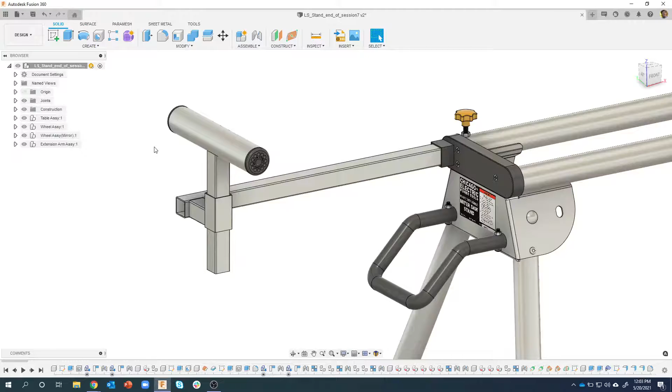So let's go ahead and dive in. We left off last time having created this extension arm assembly. I'm going to finish this up, and we're actually really close to being done. We'll finish this extension arm assembly and then move it to the other side, and that's pretty much the end of the miter saw stand.

I'm probably going to do one more episode doing exploded drawings, like you'd see in an assembly drawing. So there'll probably be one more episode for this, and then I'll have to figure out something else to teach. If you have any ideas, please feel free to share them in the chat on what you'd like to see, and we'll try to make that happen.

Okay, so we left off having finished this little end part here on this roller, and now there's a part that you can flip up and over that acts as a stop. So that's what we're going to be creating next.

Let me go ahead and activate this extension arm assembly. I'm going to create a new component called roller pin. Let me move this over here. I definitely recommend you name your components—it makes things much easier to find.

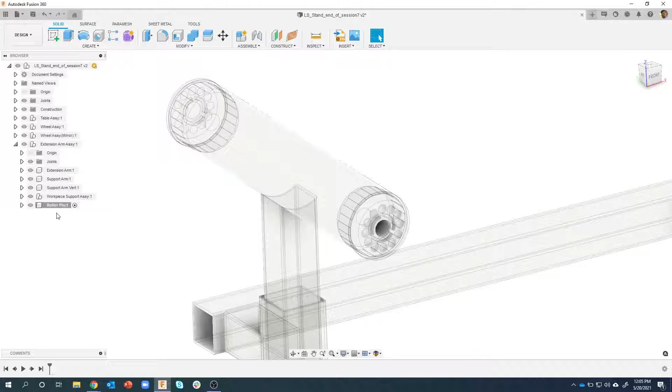Like I showed last time, I like to use some of these primitives instead of having to create a sketch just to make a pin. Instead of creating a sketch, drawing a circle, and dimensioning it, I can just get away with creating a cylinder. I'll do it on this front face right here, near where I need it to be, and just click over here somewhere.

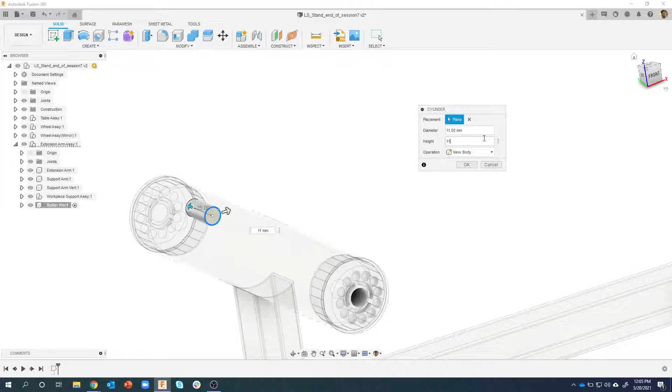Let's go ahead and make that 11.5 in diameter, and then in height, I'm going to set that. I showed this last time—I'm in millimeters right now, you can see that here, but I can also type in other units. So for example, 11.25 IN for inch, and you can see it does the conversion for me, so I don't have to use a calculator or anything like that.

Then what we're going to do is chamfer these edges with a small chamfer. Let's do maybe something like 0.5 millimeters or whatever—you can see it kind of deburrs the edges of that.

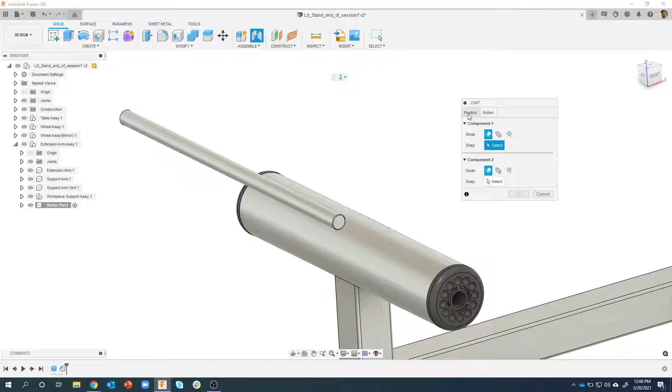Then I'm going to use the joint command to put it where I want it to be. I'm going to change my motion type. I know I want it to be a revolute, and you'll notice there's two different tabs, the position and the motion. I like to jump over here and say I'm going to do a revolute joint, and then come back here and specify how I want to position that. Hopefully you've seen enough of my live streams that I have a little saying I use when I create these joints: which one do I want to move, and where do I want to move it to?

That's kind of how I remember it - this is the one I want to move, and I want to move it to this other part. So I know it's asking for basically this rod right here. As I hover over this cylindrical face, I get a start, a middle, and an end point, so I'm going to grab this middle point right here. Then I'm just going to come over to this cylinder here, and just like the other one, it has a start, a middle, and an end. So I'll grab the middle there, and you'll see it positions it right where I need it to be, lined up in the center.

Now, the last thing it's asking for is this snap. Actually, no, I already did that. So let's jump over to the motion. It'll be hard to see, but if I hit play, it's actually revolving. I can see the shadow moving slightly, so I know that's correct. I'll say OK - so I've just positioned that roller pin.

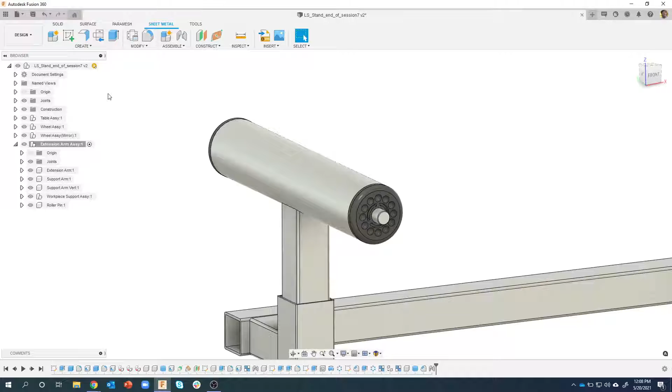Now I'm going to activate my extension arm assembly because I'm going to create another new component here, and I'm going to create a sheet metal component. So I'm going to jump over to my sheet metal tab. Now you're going to see - why did I activate this top level assembly? Well, I need to create a sheet metal component, and I want it to be underneath this extension arm assembly. If I had left my roller pin active and said sheet metal new component, it would have put it underneath this roller pin, and obviously that's not what I want. So I'm going to activate this guy, say new component, and now you can see it's going to create a sheet metal component.

Just like before, I can give it a name. I'm going to call this workpiece stop. And I'm going to expand open this library, so you can see I've already done some sheet metal parts in this design. But if I expand open this library, I can see all the different kinds of materials that I have, and I want to pick the stainless steel millimeter. So I'm going to go ahead and do that one there - stainless steel millimeter.

If I expand that open, I can see what the thickness is, what the K factor is, etc. So that's a little tip - if you want to know what size that is, you can expand open any of these. Here's steel, you can see 2.5. If I expand this guy open, you can see that's inch, 0.1, etc. So I'm going to say stainless steel millimeter.

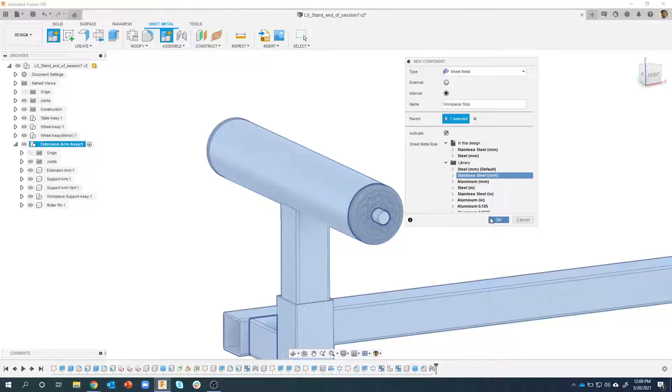And now you can see I have a new sheet metal part underneath the extension arm assembly called workpiece stop. I love our sheet metal module - it allows you to create sheet metal parts very, very quickly.

So I'm going to just start with a basic shape, like a rectangle, and then I'm going to start folding that shape. Start with a rectangle here - I want it to be 260 millimeters wide, 260 by 50 millimeters tall. And there is my shape.

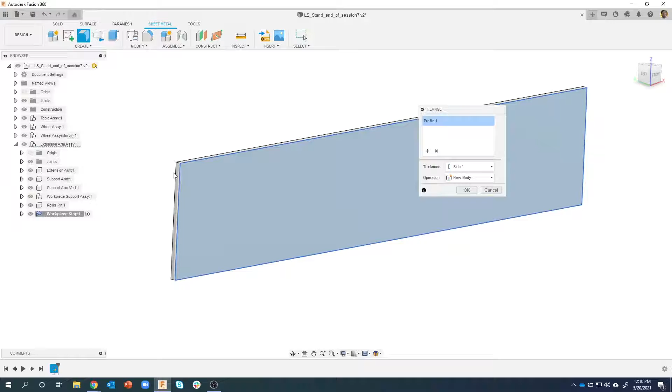If I use this flange command, if I hover over it, you'll notice it's actually like multiple commands in one - it can create sheet metal faces or flanges. Right now I don't have anything except for a profile, so I'm going to say flange. I'll click on that, and you'll see it's going to use my sheet metal rule, the material I picked, and the thickness for it, and it's going to create a sheet metal component for me.

Then I can come along and start modifying this. I could come up to the flange command, or I could pre-select. For example, I'm going to pre-select that back edge, right mouse click, and you'll notice at about 4 o'clock is the flange command, so I don't even have to go up to the menu. I pre-selected that edge, right click, and say flange.

I personally like to start to drag to kind of visually see what's going on, and you can see how it's going to bend that over. For this, I want the height to be 13. You can see how that updates. Then we have a lot of options here like angle, height datum, bend position, etc. I'm going to leave this to be outer faces.

If you don't know what these mean, I highly recommend watching my live stream on just the sheet metal module itself. I go into a lot of detail about what the height datum and bend positions mean. In fact, I even create a cardboard box and show how to do these folded cardboard boxes, so keep an eye out for that. I'll try and link that in the description of the video.

So height datum, I'm going to say outer. Bend position, I'm going to say adjacent. And watch what happens when I say adjacent - you can see how it moved up a little bit. So having different options here gives me different results. I'm going to say adjacent, and that'll make more sense as we keep going.

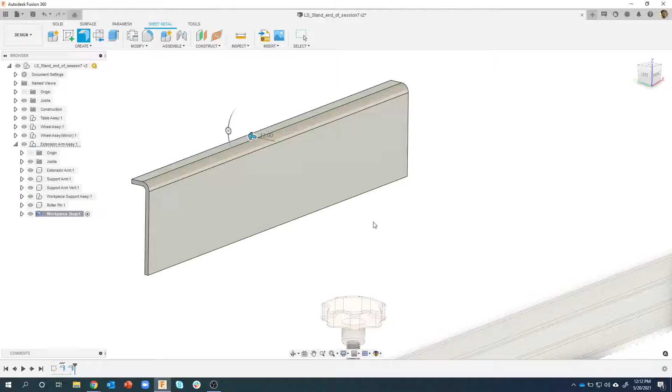I'll say OK. Then I'm going to do the exact same thing here. I'm going to click this front edge and say flange, and start to drag to see what that looks like. Now I'm going to do something a little bit different - instead of a full edge, I'm going to do a symmetric. Watch what happens: I get these arrows, and if I start to drag them, it's going to create a symmetric flange.

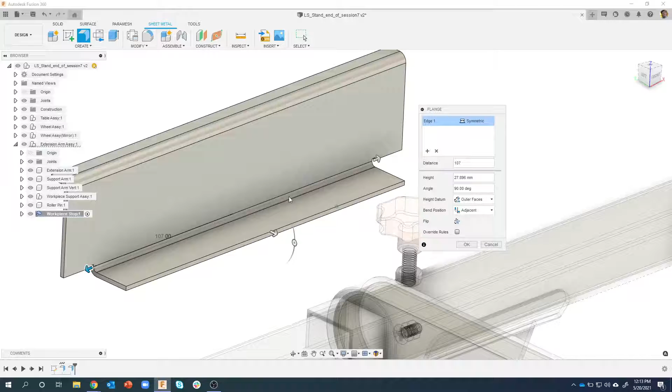You'll also notice if I zoom up here, there's some bend reliefs, and we're going to talk about that in a little bit. But I want the distance to be 107 millimeters, and you'll see that updates - this is 107 millimeters wide right here. The overall height I only want to be 19 millimeters, so you can see how the height was shortened a little bit.

We'll do outer faces, we'll do adjacent. But I don't want to have this corner relief like this - I want to do what's called a tear. So right here is override rules, I'm going to expand that open, and I want to do a bend relief override. Bend override would allow me to change the radius of this bend right here, while bend relief is this little thing you're seeing right here.

So I'm going to check that on, and you can see bend relief is straight. Watch what happens if I go to round - you'll see that changes to a round relief. Or if I go to tear, you can see it just doesn't have one at all - it's going to tear the material there, and that's kind of what I want in this case. So I just did this bend relief override, and we'll say OK.

Now think about if I were to have to model this by hand without using sheet metal - totally doable, but that would take some time and effort. But all I really did was create a rectangle, thickened it with the flange command, then did the top flange, and then did this bottom flange.

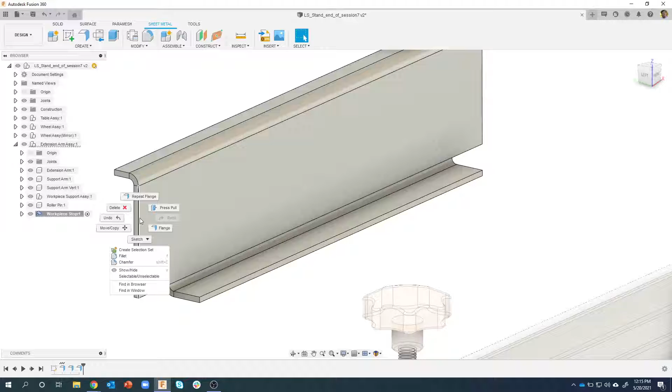Now I want to create some side tabs. Just like before, I'm going to pre-select that edge and come in here to flange. Now if I start to drag, watch what happens - it starts to give me a preview of what that's going to look like. Again, I don't want to do a full edge. Last time I did a symmetric.

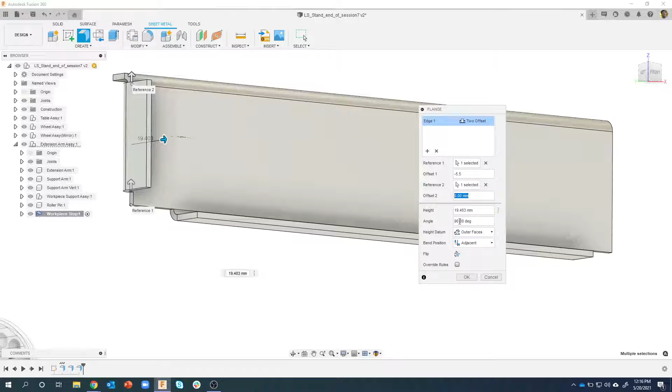This time I'm going to do what's called a 2 offset. When I do a 2 offset, you'll notice my menu gets a little larger, and you see these references, so I can specify how far from this first reference I want the tab to start. They're labeled reference 1 and reference 2. On this bottom one, I want to come up 5.5 millimeters - so I typed in minus 5.5 millimeters. For this other offset, I want to do 22 millimeters, and you can see how it brought that way down. So I'm basically able to put this tab where I want along that edge.

And just like before, I don't want to have a bend relief, so I'm going to change that to a tear.

And then the last thing I need to do is specify how far this tab comes out, and that is this height. So we're going to say 40, and we can see that sure enough it creates that tab. Pretty quick and pretty easy.

So I looked over at the questions Angelo is bringing into this document. A question from Greg Hale: you mentioned a while back about doing a Cessna Skymaster drawing, any chance of doing this in the future? I think this is actually humorous because I thought about that this morning. I have them hanging up, in fact, let me switch to my camera here. I actually have them hanging up right here in my light and all that kind of stuff. So yes, Greg, I want to do that. I haven't had the time, but it is on my list, and it might be a future upcoming one, because no joke, I was looking at it this morning going, man, I really want to do that. So thanks for asking, and kind of freaky that you were thinking what I was thinking today.

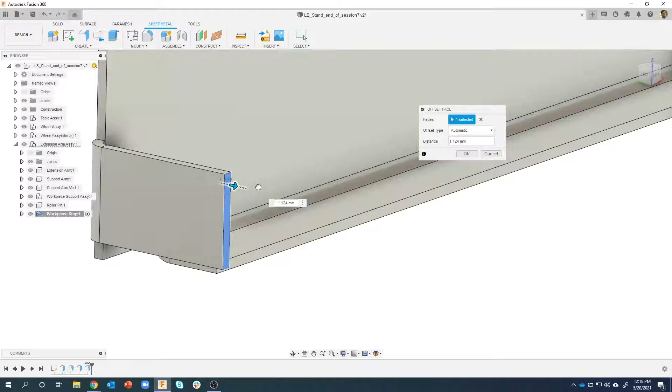It's been a long time since I've done this. If I were to make a physical change, like do a press pull... yeah, see now it's maybe not doing it. I might have to restart Fusion to have that happen, but I think it shows the original and then shows the update. I like to look at it just like I'm physically changing the model. I don't really personally like that ghosted result thing, so I have it turned off. So Steve, to answer your question, yes, I do have that turned off, and I personally recommend having it turned off, just a personal preference. So I'm going to turn that guy off.

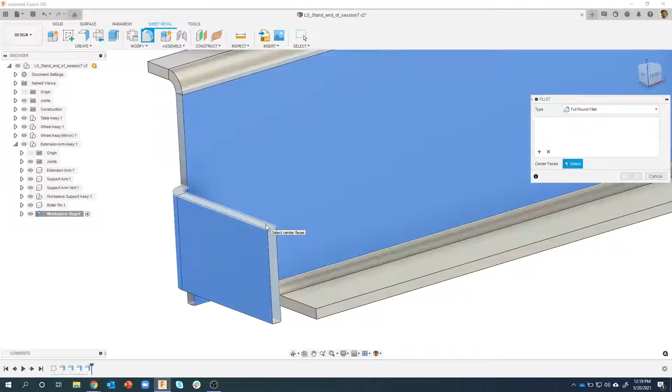Okay, so we created that tab. Now I want to fillet these edges. I showed in a previous live stream that we have a really cool new fillet feature called full round fillet. Unfortunately, it doesn't work yet with sheet metal parts, and you can kind of see why—as I'm hovering over this face, it kind of knows that this was originally this other face and all that kind of stuff. I do know they're working on adding it into sheet metal, so I can't do a full round fillet right here.

However, I'll show you a cool tip in case you can't do a full round fillet. I want to do a full round fillet here, so I'll select that edge. But what do I need to type in for the distance? I have no idea, so I can click on these three little dots and say measure. Then I click on an edge and watch what it does—it measured that edge and entered that number in there. So 22.5, well that's too big, I want half of that, so I'll come in here and say divided by 2. Now it took the length of this edge and divided it by 2, and sure enough I get that result. Let me add in that edge there, and you can see I basically get a full round fillet.

So once again, I was just clicking on these three little dots. It shows my last numbers I've entered in here, but then also that measure option. Cool little tip there.

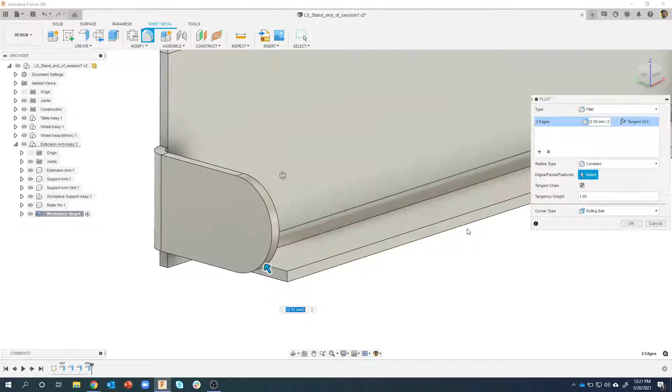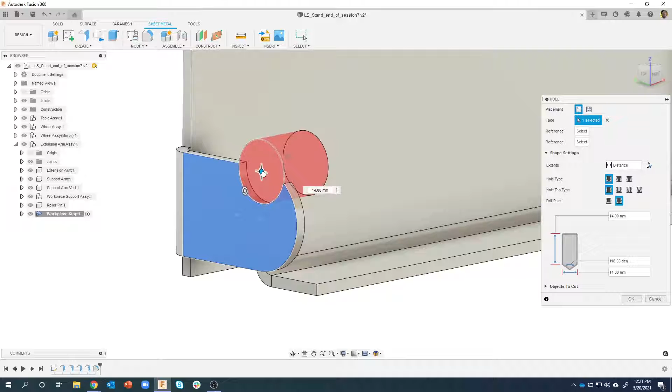Then the last thing I want to do is put a hole through here, and again, I love the hole command. I'm going to come up here and say hole. I purposely click kind of away from where it needs to be, so you can see where I clicked and where it showed up. Then I can click and drag, and you'll notice I get these two little white dots below the circle. This right dot is the center of my fillets over here, and this left dot is the center of the whole face - almost think of it as the centroid of that face. All I have to do is get near this dot, and you can see it snap into place. Now I know that hole is perfectly centered with my fillets. I didn't have to create a sketch, draw a circle, add dimensions, any of that.

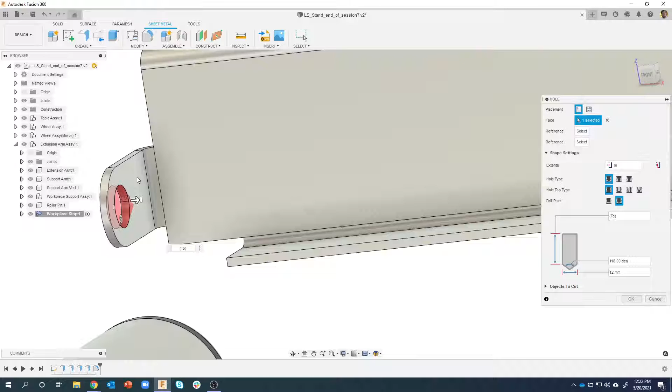All I need to do now is type in the correct diameter, 12, and then instead of a distance, I like to say go to a particular face. So I'm going to rotate around, click that face there, and it knows it needs to drill all the way through to that face. I might even say let's just do a flat. I'll say okay. Now why did I say to go to that face? Well, if I ever change the thickness of this material, I always want that hole to go through. So if I made this thicker and only went 2 or 2.5 millimeters in, and then changed it to a 4 millimeter thickness, it wouldn't go all the way through. But by saying go always to this face, no matter how thick that face becomes, the hole will always go through it. A neat little tip there.

Okay, so I just spent some time creating this tab, and I want the same thing over here. This is another thing that blows me away with sheet metal - you can actually mirror features and it'll still unfold. What do I mean by that? Check this out. I'm going to say unfold, unfold all the bends, click on this stationary entity, and we can see that sure enough, everything unfolds.

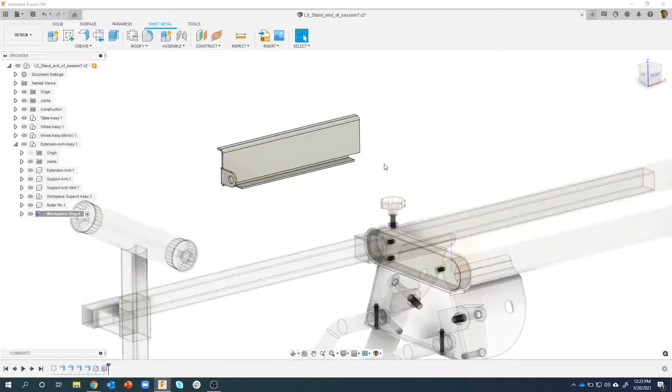Okay, well now I need to mirror. But I created this kind of out in space somewhere, so if I turn on my origin, it's way over here somewhere, so I don't have a mirror plane. I need to create one. So under construct, midplane - this creates a construction plane at the midpoint between two faces. Select two faces or planes. I'm going to say this face here and this face here, and you'll see it created a plane between those two faces.

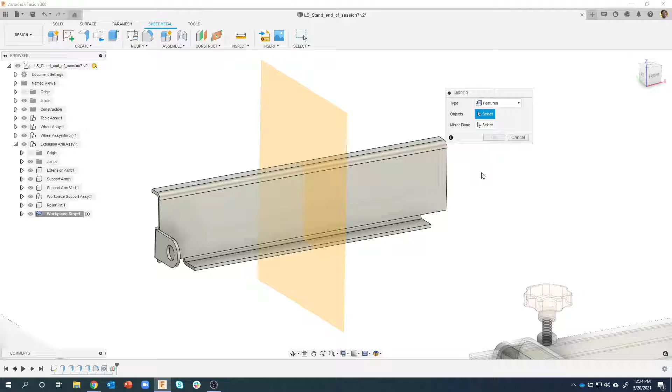I'll say okay, and then check this out - I'm going to come in here and say mirror. Now by default it says faces, but I hardly ever use faces, I almost always use features. So I'm going to switch to features, and I want to mirror the flange - this last flange, you can see when I hover over it, it highlights the flange right there. I also want to mirror the fillets, and I want to mirror the hole. I don't need to mirror the construction plane, so I selected 3 features out of my timeline. What's my mirror plane? This is my mirror plane. It gives you a little preview of what that's going to look like. I'm going to say OK, and that mirrored over to the other side.

Let me turn off my construction. Now, one thing I like to do is check - is that still a sheet metal part? I can check that by coming in here and saying unfold. What's my stationary entity? This guy here, and notice it still unfolds. So that's a verification that it is a valid sheet metal component. The fact that we were able to mirror that feature over to the other side, I just think is huge.

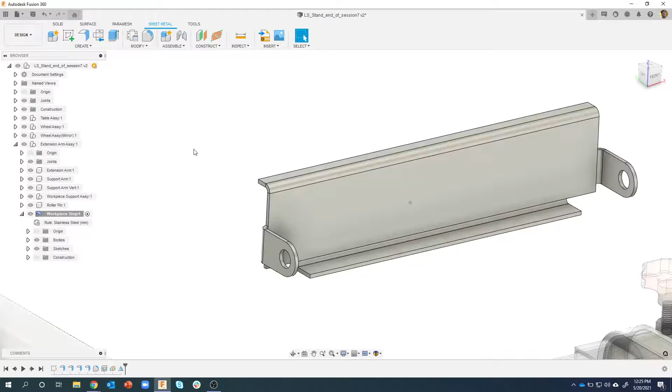Okay, I don't like to have sharp edges here, so I'm going to select a couple edges and just fillet these. Let's just do maybe like a 5 millimeter fillet.

So I'm going to grab a bunch of edges here. I think there's 6 in total. So I'm just going to kind of zoom up.

Here's another trick. There's an edge here. If I just get near it, you can see that because I'm in the fillet command, it allows me to probe through and grab that fillet that's kind of hidden. Same thing with this guy here. I don't even have to rotate, I just get where the edge is, and I'll go ahead and click.

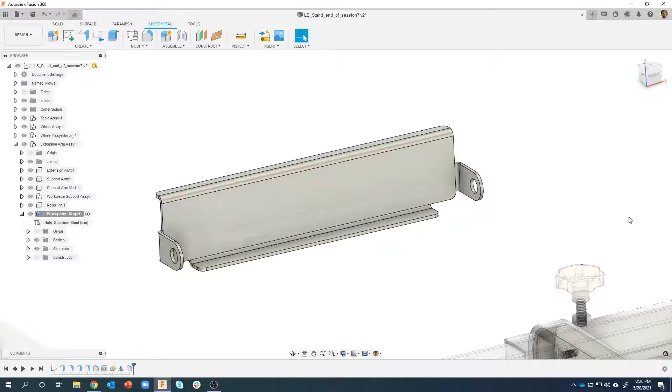And we've added in all of those edges, in fact 6 of them. And that is our sheet metal part. Didn't take very long to create. If I were to try and model that by hand, yes it's doable, but that would take quite a bit of time, quite a bit of effort, I think.

So let's go ahead and position this in place. I'm going to activate my extension arm assembly, and let's create a revolute joint, because I want it to revolve around that pin. So sure enough, revolute. Now I want this to be centered. So I don't really have a location to pick, right? I mean, I could grab like here, but where on this pin does that go?

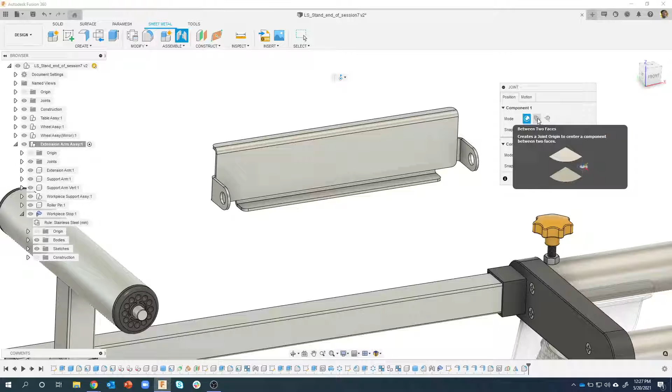So here is where between two faces really comes into play. Check this out, I'm going to say between two faces. What's the first plane? I'll grab this guy here. What's the second plane? I'll grab that guy there. Now it doesn't look like anything happened, but watch what happens when I get near the edge of this circle here. You can see the joint origin is now centered on a plane. So it's basically creating a joint origin centered on this circle between those two faces. So all I have to do is click, and it created that point right there.

Then all I have to do is, for example, hover over this rod or this pin and grab the center point there, and watch what this does. It positions it and does a revolute joint. Let me go back here. And it perfectly locates it where it needs to be.

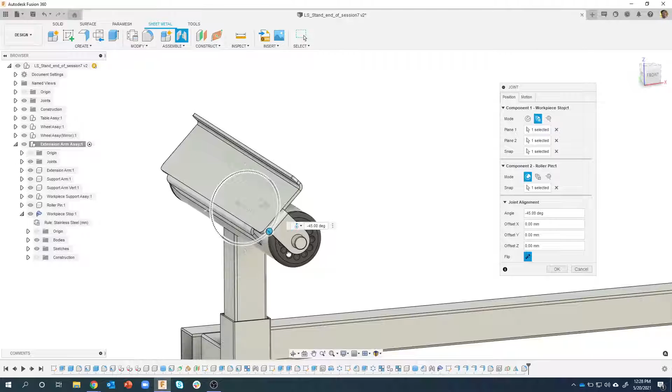Now I want to come back here and let's rotate this guy. Let's rotate it over onto this side over here, 45 degrees. Great, we positioned it. But as I zoom up, I notice an issue. And this is the power of Fusion and using, for example, the sheet metal: we notice that it's clashing.

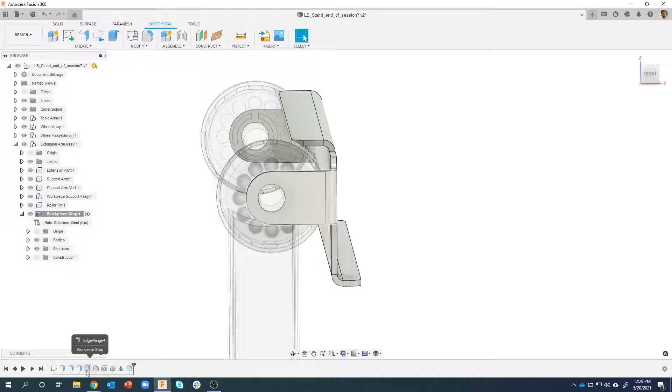So let's go back and edit this workpiece stop. If I look at this, maybe I could shorten that a little bit, or maybe lengthen the arms, give it a little bit of extra room. There's not a lot of room right there. So I'm going to go back and edit this feature way back in time. This is where we created that flange, so I'm going to go ahead and edit that feature.

Now it looks like it disappeared. Well, why did it look like it disappeared? Well, we went back in time and we went back before we positioned the part. So the part is back here where we originally created it.

And maybe instead of 40 millimeters, let's just add 10 more, so let's go 50 millimeters. You can see how that preview updated a little bit. Watch what happens when I say OK. Everything downstream updated: the fillet, the hole—you notice the hole still in the correct location—the mirror, and all the small fillets, and the position where it needs to be. And we can see that sure enough, we have enough clearance now.

So I was able to go back and make that change, and I just think that's huge. You might not know that it's going to clash until you start positioning these parts together, and you need to make that change.

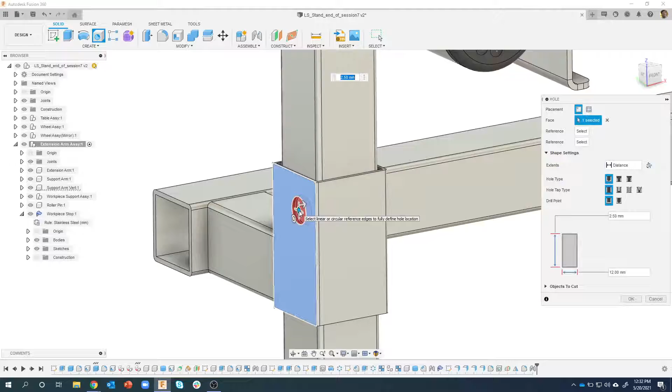I click out where it doesn't make sense, and then I drag it to where it does make sense. You'll notice that one dot in the center of that face, I'll go like that, and the hole is perfectly centered. I didn't have to reference anything or do any dimensions. It's so quick. I'm going to do a 9mm hole for this.

Again, instead of distance, I'm going to say To, and I'm going to rotate a little bit. I'm just going to click this inside face like that, so it's just going to drill as far as it needs to. I don't want it to go into this other part. In fact, if I expand open objects to cut, I can see that it's only cutting one part.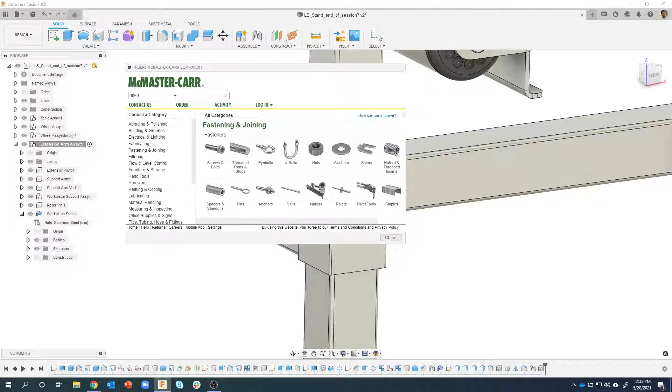Some of this is pretty repetitive. I'm going to bring in a McMaster Carr component, a nut. Again, to speed things up, I typed in the McMaster Carr number for that: 90592 alpha 022, and I search for that. It actually finds the metric 8 medium strength steel hex nut.

I can come in here and say I want this as a step file. I can even say step file with no threads if I don't want any threads on it, but let's just leave it like that. I'll say download, and this is going to allow me to bring in this metric 8 nut.

Now it brought it in at the origin, it usually does, so I'm going to bring it kind of where it needs to be. I could rotate it, but there's no need to. I'm just going to go ahead and say okay.

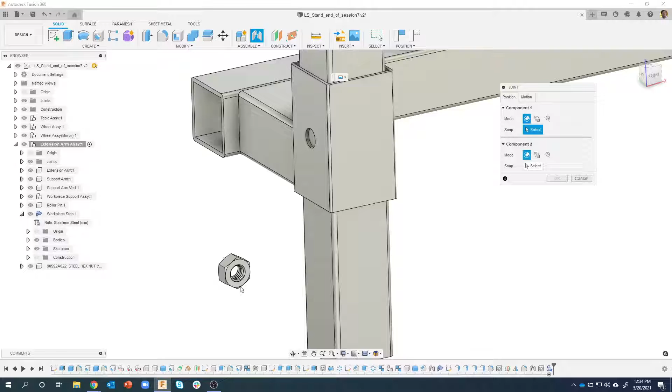And we'll create a rigid joint. Which one do I want to move? This is the one I want to move. So I'm just going to hover over like a circular edge, and you can kind of see it grabs that center point right there.

Where do I want to move it to? I want to move it to this edge over here. So I'm going to click there, and you can see it instantly positions that part. Now some of you might be like, oh, I don't want the peak at the very top. Well, I can just rotate this, right? I don't have to leave that point at the very top. I could rotate that 60 degrees or whatever.

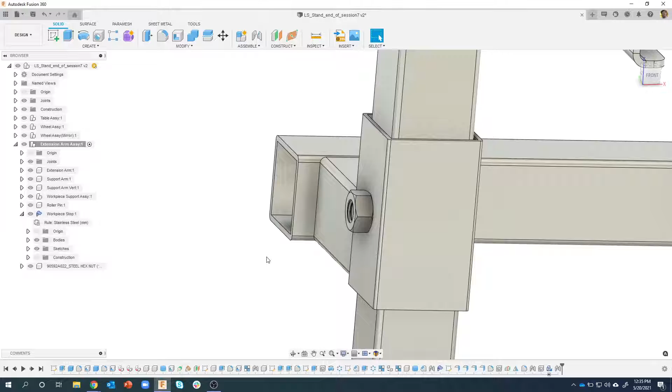And say okay. Now I'm going to create the sheet metal part. Again, I don't have a live example of this. I wish I could show you the finished, what it looks like. But it's basically a really thin piece of sheet metal that when you tighten down the knob, it kind of pinches in between here and basically keeps it from sliding up and down. It'll make more sense once we create the part. Now, I said some key words there.

It's a very thin sheet metal part, in fact only 0.6mm in thickness. So I'm going to jump back to my sheet metal, and under modify, I have this sheet metal rules. In this design, I've got 2.5mm thickness. I'll expand open my library, and if I expand open all of these guys, you're going to see that I don't have anything that's 0.6mm in thickness, except for the one that I've already created.

So let me go ahead and delete that guy. What I'm going to do is I want it to be stainless steel, so I'm going to hover over this stainless steel, and you'll notice two icons, the edit rule and new rule. So I could edit any existing rule, or I could say new rule, and it's going to copy the settings.

So you can see it says stainless steel, it's 2.5. There's my K factor. Well, I'm going to come in here and say I want this to be 0.6. And I might even come in here and say let's make this like 0.6. That's just the description, it doesn't really matter. I'm going to leave everything else the same, the K factor and everything else. I'll hit save, and now you'll notice I have a new material that's 0.6. If I expand that open, 0.6. So I can reuse any existing ones to help me make a new material.

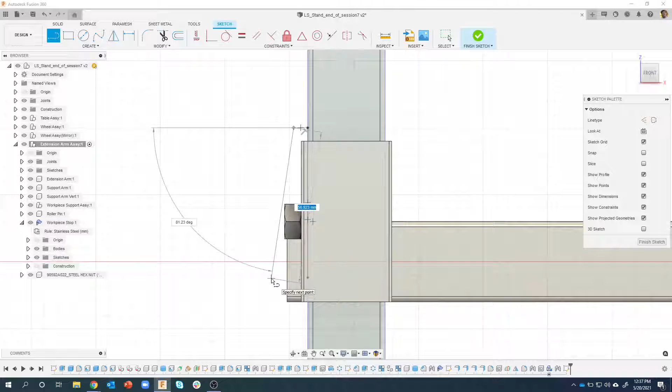I'm going to create a sketch on this face here. I'll say create a sketch. I want to grab some information, so I'm going to project some information here. I want to know basically where this body is right here, so I'm going to project that guy. I'll say OK. This is a little bit of an approximation, I'm just kind of eyeballing what I want this to look like, but you'll notice I can snap to this edge here now. So I'm going to click there, come up a little bit, something like that, come over. Let me go ahead and do the line again. I just want it to kind of barely touch this nut like that, and I'll say okay.

Okay, so I'll throw a dimension on here now. Wow, I was really close. I wanted it to be 55 and it was 55.9. I want this to be equal length to that, so I'm going to say equal that edge and that edge, and you can see now they're equal length. Honestly, I really don't care how big that is right now, I'm just going to leave it alone. I know it's not a fully constrained sketch, but in this case it doesn't really matter right now. I might come back and define it a little bit later, but I now have that sketch.

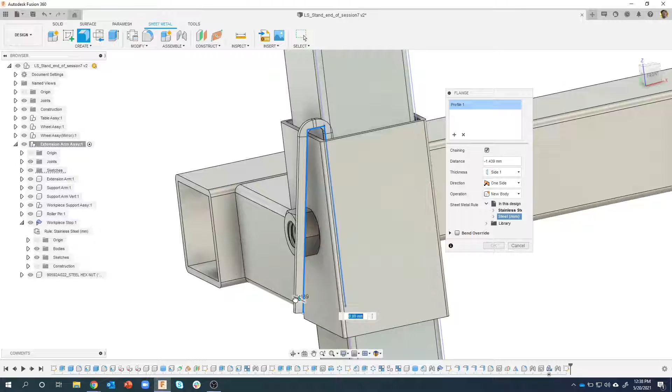We'll use the flange command and check this out. I just created this open profile. It's not a rectangle or anything like that, it's an open profile, and if I click on this, I can start to drag, and you'll notice a couple issues. First of all, I didn't create a new sheet metal component. So I should have done that, and I should have done it before I did my sketch, but that's okay.

I'm going to say new component, and we're going to call this plate, and I'm going to pick, I totally forgot to do this, the joys of live, the new material, 0.6, okay. Flange. I'll click on that guy, start to drag, and now we notice much thinner material. Yay. Okay.

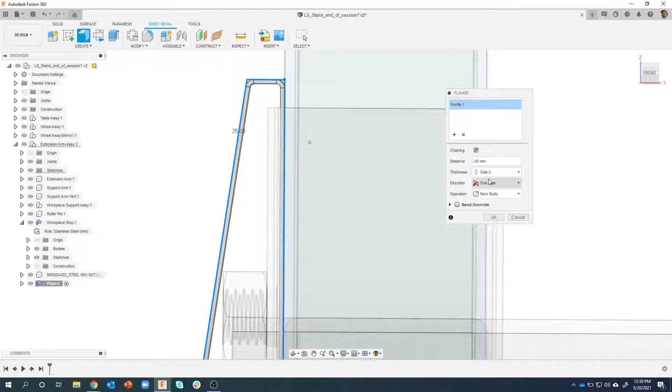What's the distance? I'm going to say we want it to be 25, so I'm going to say minus 25 in this case. Now you'll notice a couple issues, it's actually like inside the part right now. I could change this thickness to side 2, and you'll see that it goes inside like that, and that is what I want in this case. So you have the ability to specify which side, or you could even say symmetric, and so it kind of goes around, oops sorry my bad, right here, symmetric. You can see it's going half the distance up and half the distance down. So I'm going to do side 2 in this case, and I'm just going to go ahead and say 25 millimeters. It does the bends for me automatically, which is pretty cool. I'll go ahead and say okay, but it's in the wrong spot, right?

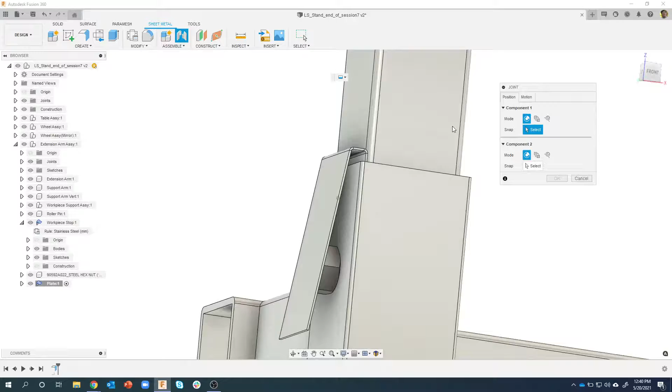I used this face here to kind of create my profile, so let's go ahead and position it where it needs to be. I'm going to say joint, I want it to be a rigid joint. And here's a neat little tip, I'm going to zoom up a little bit here. If I hover over this line, you'll see that it has a start, a middle, and an end. So I'm going to just click on that middle point, and then I'm going to do the same thing here. I want basically that edge to kind of ride along this edge here. I'm going to grab the middle point there, and we can now see that that is perfectly centered, and it's sitting down where I want that to be. Now it's not sitting flush, but because this is bent, it really wouldn't do that. So it's basically lining up that edge with that other edge, and that's what I want. So I'm going to go ahead and say okay, and it is now in the correct location.

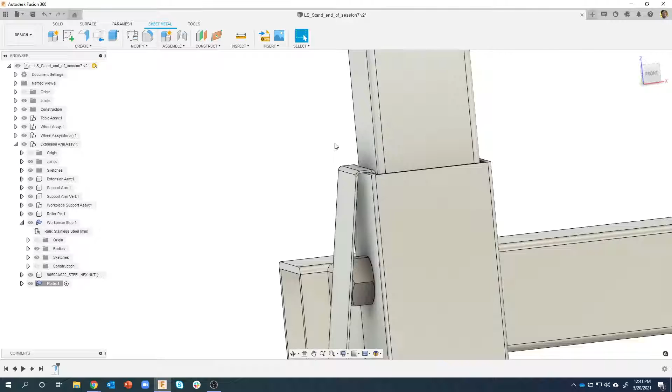I know we're going through at a pretty good pace here. A lot of this is kind of repetitive, but you can kind of see how we're building things and positioning things where they need to be.

Now I obviously need to have a hole in this sheet metal part. So I'm going to click on this face, right mouse click, and you'll notice that because I'm in the sheet metal, I don't see the hole command. Usually the hole command is over here. So I could go to create and do hole, or I could hit the H key and it brings up my hole command. So I'm going to do that.

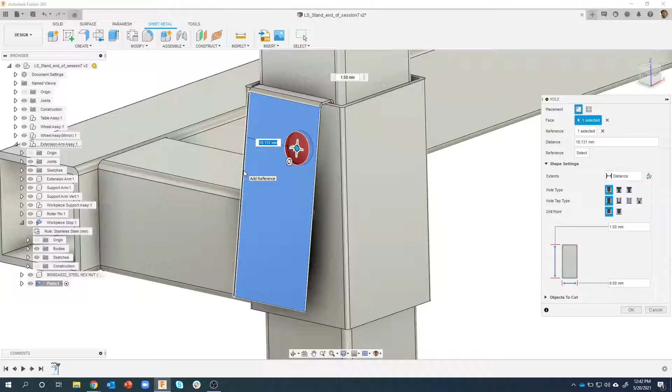I'll click on this face. Now I do want this to be in a very specific position. You'll notice as I'm moving around, some dimensions kind of hop on the screen a little bit, and this is that reference you see right here. So I'm going to reference this left edge, and I want that to be 12.5 over. Then I'll reference this bottom edge, and I want that to be 24 - that's pretty much lined up with that nut. Maybe I could even make it 23 or 23.5; I have some flexibility there on where I want that hole to be. In this case, I'm just going to say 24.

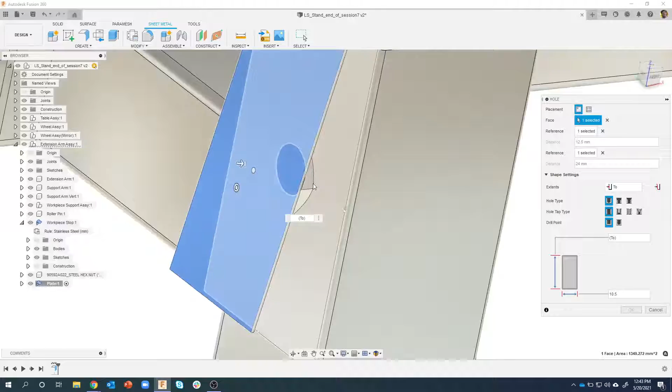What size? I want it to be 10.5. Say OK. Oh, actually, instead of distance, I'm going to say To, and pick that inside face so it only goes through that sheet metal part. And there we go - we now have a hole through the sheet metal part. You can kind of see what's going to happen here when we tighten this down: it's going to push the screw against this sheet metal flange back here, which is going to kind of bind it against this extension arm. So that's the idea behind this.

Okay, let's fillet it - 6 millimeters. Again, I don't even have to rotate, I can just pick those two edges. Say okay. Okay, a couple questions.

So Eyal made a really good point. He said, because Brad screwed up, where is the sheet metal sketch? Typically you create a sheet metal component, and then the sketch is underneath that sheet metal component - that's how it's supposed to work. But because I forgot to do that, let me switch over here. The sketch for that - if I expand open this plate, you'll notice it doesn't have a sketches folder. But if I come in here, here is my sketch - it's underneath my extension arm assembly, right there. So yeah, not the best method. I didn't want to undo and redo my sketch and waste time. I should have. So Eyal, good point there.

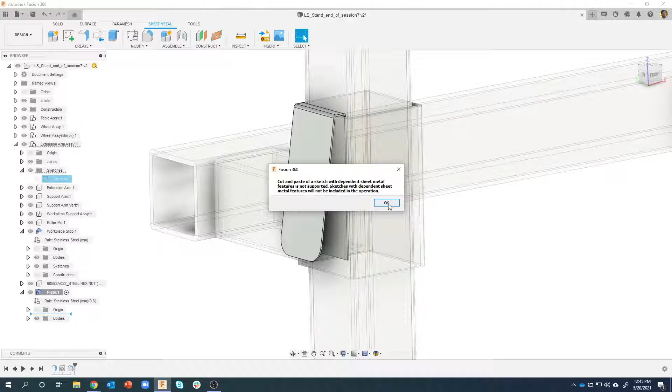And then Stuart, kind of to add on to that, asked can you move a sketch to another component? Let's see - can I just drag that sketch onto my plate? Cut and paste of a sketch with a dependent sheet metal feature is not supported, so unfortunately in this case it doesn't look like I can. Let me try and drag it underneath it, like into here maybe. Yeah, so in this example it won't let me. In other situations, it might let you. Again, it's not always as cut and dry as you'd expect, because of where the sketch was created in time. Let me try one more thing - let me activate the extension arm assembly and see if that will let me do it. I don't think it will. Yeah, it won't. So I should have undone my sketch and had it underneath my plate. Slap of the hand for me on that.

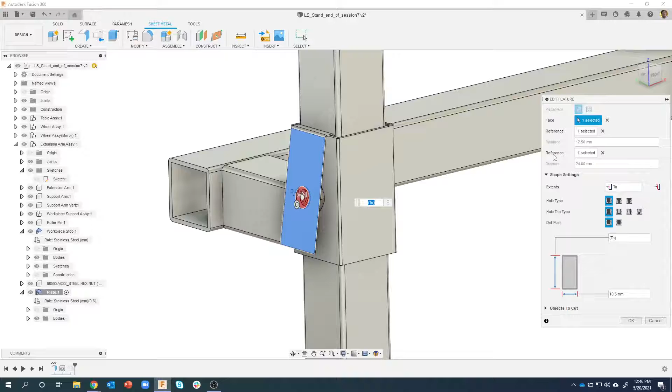Somebody asked how you would go back and correct the reference of the hole. On the sheet metal part, if I double click on my hole feature, you'll notice it says reference 1 selected, and it's at 12.5, and reference 2, 1 selected, is 24.

So I could hit this little X right here and then select my reference. Now it should let me click on an edge. Let me go select. Maybe it won't - oops, clicked wrong. That's a good question, I would have expected to be able to reference that, and it's not letting me. Okay, I will have to delve deeper into why it's not letting me do that. Maybe I have to clear both references and say reference. Yeah, it is interesting.

So let's do face. Don't know, that's a great question, I will bring that up. I always thought you could go back and re-reference, but maybe you can't. In that situation, what I would do is go before that and create another hole if need be, and just suppress that hole there. But let's keep moving forward because I'm going to run out of time, unfortunately, and I do have a hard stop at the top of the hour.

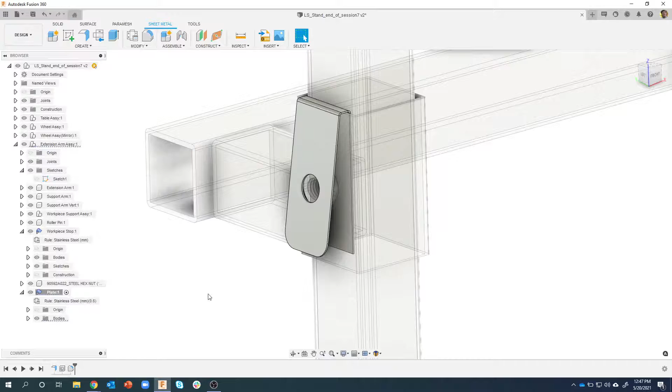To finish this up, I'm going to insert another McMaster-Carr component, which is a yellow plastic knob - part number 2907T27. I'm just going to search for that, and you can see it finds the 7-arm grip knob. Let me expand that open a little bit and say download. It's going to bring it in at my origin.

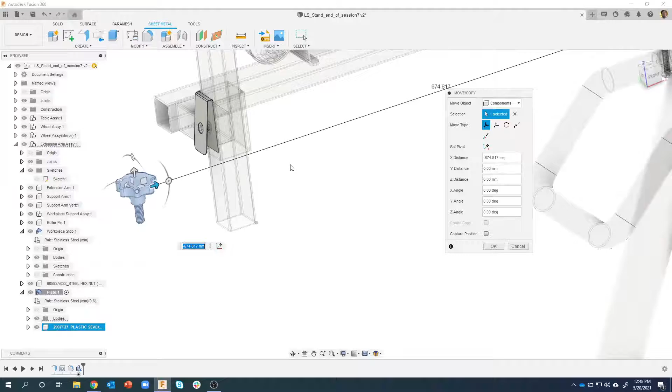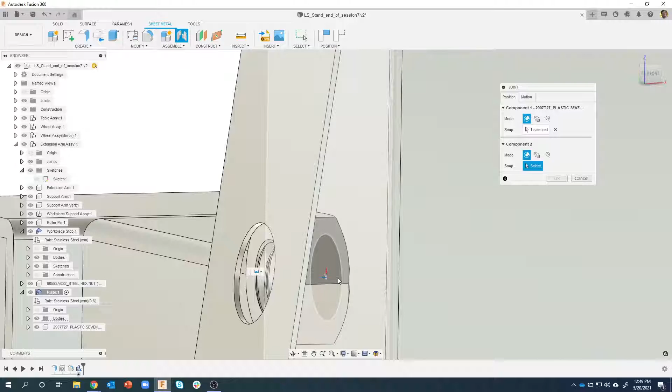So let's drag that over. I'm just going to say okay, I could rotate it and all that kind of stuff, but because I'm going to create a joint, it doesn't really matter in this case. What does matter is where I want this face here to be flat with the sheet metal part. I'm going to hover over this edge and it's going to grab that center point there, then come in over here and hover over this face, and you can see I can grab that center point right there. Now I could also turn the parts off - I'd probably turn this part off to actually grab the sheet metal part, but because I'm falling behind, I'm just going to grab that point there, and it brings and lines up that point. We can see my hole is big enough for that to go through.

I could make it a revolute if I wanted to. I'll go ahead and say okay. To change the appearance, I'm just going to hit A for appearance - that's the shortcut - and drag that appearance on there like so.

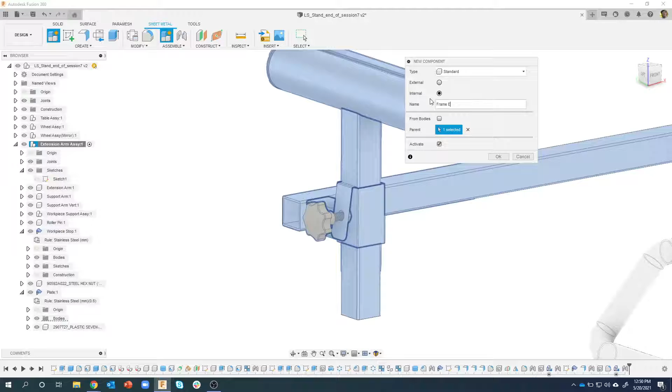Cool, so the next thing I'm going to do is there's a plastic component that goes here. I'm going to create a new component, so I made sure my extension arm is active. I'll say new component - now notice it remembered my last component type was a sheet metal component, but I'm going to say I want it to be a standard component. Now I can come in and say let's just call this frame end cap. You'll see a new regular component called frame end cap. Let me minimize some of these guys.

Okay, just like before, let me switch to my solid tab. I'm going to create a primitive, a box primitive, and let's do this maybe on the side plane because it's kind of lined up with the side here. I'm just going to draw out in space somewhere, 30 by 30, and I want it to be pretty thin actually - I think it's only 3 millimeters.

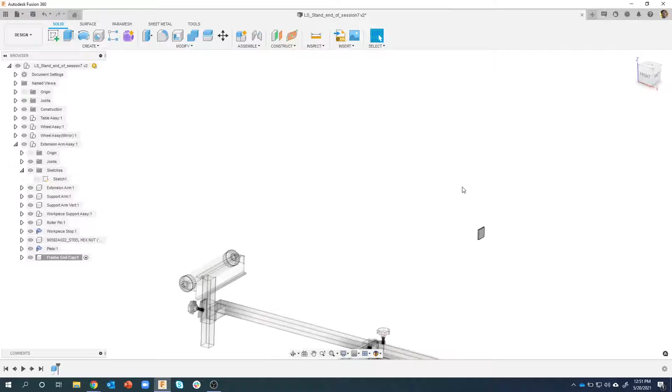Now you're going to see some interesting things here. I'm going to purposely make a mistake and then we're going to fix that, and I think it's pretty cool. It's actually a trick - I think Blaze Barrett actually showed me this trick. I want to give a shout out to him because I think he was the one that said you should try this out, and you'll see that here in just a second.

So what I'm going to do now is create a sketch on here, do a rectangle - I want to do a centered rectangle. Now you'll notice I don't have a center point, but there's a really cool tip here. If I hover over this edge, you can see I get this snap guide - it's kind of found the center of that edge. Now I'm going to hover over the center of this edge, and now I have these two snap guides, and it shows me right where the center is. So I'm going to click there, and I found the center of that rectangle, of that face I should say. But this is going to come back and bite us here in a little bit, and that's the tip I was going to show you. So I'm going to say 28, 28, and I'll say OK.

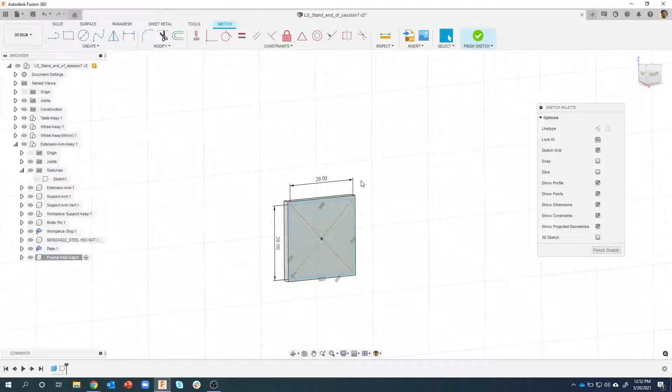I'll rotate a little bit isometric. I'm still in my sketch, but I can go ahead and select this profile, right mouse click, and say extrude. It finishes my sketch for me automatically. I can come in and type in my distance. Let's just say 10 millimeters. Say OK.

Now I want to shell this guy out. So I'm going to grab that face and say shell, 3.5 according to my outline.

Now I want to fillet a bunch of edges, and this is a little bit difficult to do. I have to click this edge and say fillet, and then come in and select these other edges, potentially rotate around, all that kind of stuff.

Well, here's a neat trick. I'm going to say fillet, and then I'm just going to draw a box like so, and grab those two edges. Let's just do 2 millimeters.

Then I'm going to hold down my Shift key, because I want to add some extra stuff. I'm just going to draw a selection box around - I'm sorry, Control key, my bad. Control key, and it should let me do that. Why is it not? Man, I am not having much luck today, am I? Control.

That is, I'm getting weird results, guys. Let me try it down here. Shift key. Maybe it's Control Shift. There we go. Sorry, my bad. Control Shift.

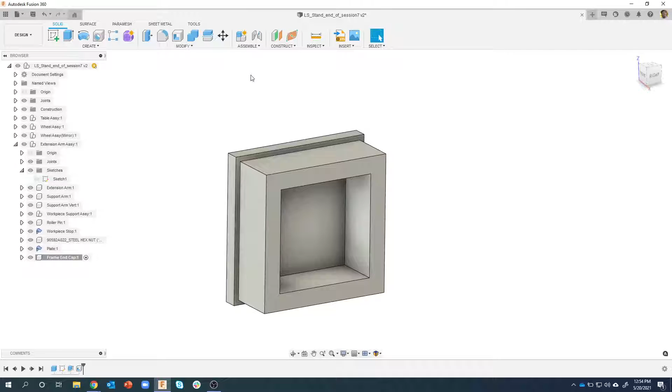Okay, so let me start over. I was getting weird results, and I want to make sure I'm showing this correctly. So I'm going to say fillet, draw a box, and you'll notice if I stop moving, it says specify fillet radius, so I'll say 2. Then it says hold Control to modify selection. So if I hold down my Control key, now it says select edges, faces, or features and stuff like that. So I could come in and click.

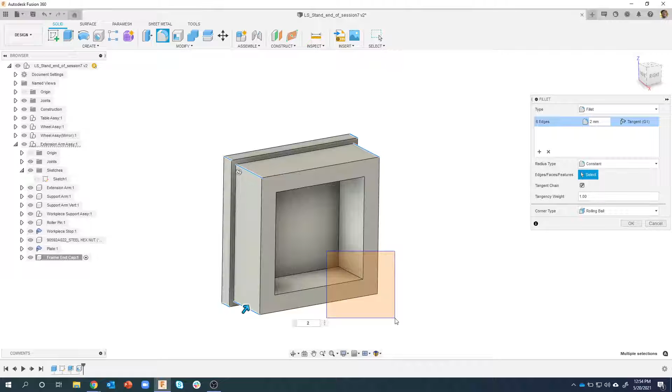I'm going to hold down Control and Shift, and that's going to allow me to add in extra edges. So I'm just kind of drawing boxes like so. Now be careful, don't draw too big. For example, if I start up here, it's going to select this inside edge. So if I do that, I get the edges I want, but also this extra edge I don't want. But I can always come in and just unselect it. I've now selected 8 edges using kind of a window selection. I couldn't just draw a big box around the whole thing, it would select every edge, but I was able to control my windows and grab what I want.

Not the smoothest method that I showed, but let's go ahead and select this face, and do 1.5. Check this out - I clicked on the face, and it grabbed all of the edges that have to do with the face and filleted those. Now I could have grabbed just an edge, and because chain is on, it would have gone all the way around. But I like to show that you can click on a face and it'll select all of the edges that are on that face. So we'll say OK, and we now have that guy.

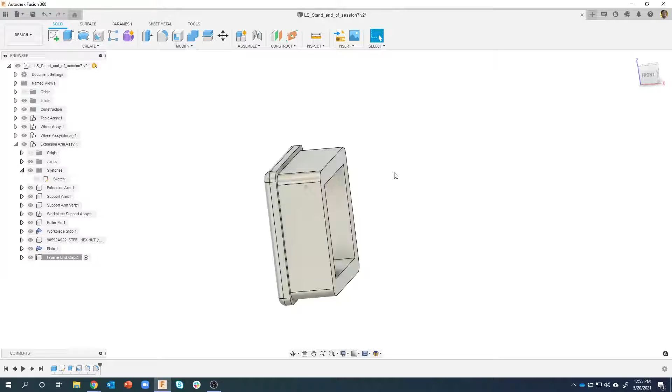Now this fits into the end of the metal piece, and right now it would be a pretty tight fit - you'd probably have to really hammer the thing in. So there's basically some grooves that are created here that allow some flexibility. So I'm going to actually edit this original sketch. Let me kind of zoom out here.

And I'm going to create an offset of this rectangle here, and let's just do 2 millimeters. I'll say OK. Hopefully you guys are cluing in on what's going on here, but you'll notice that my sketch is not fully constrained, and that's going to come back to bite us here in a little bit.

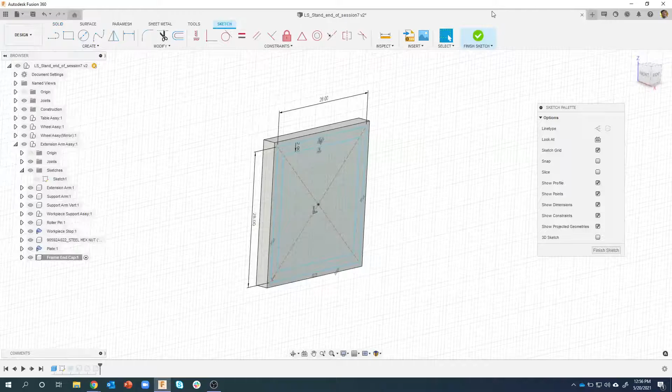I'm foreshadowing. I'm going to go ahead and extrude this profile. Oops, let me cancel out. I'll finish my sketch, that way we can kind of see what's going on here. And I'll expand this guy open so you can see. So I'm going to grab this profile here and say extrude.

As I start to drag in this direction, you're going to see it's going to cut some material away. So I want to go 3 millimeters into the part, and we want to cut that material. So I just created that little groove there.

Well, I want another one. I could extrude again with an offset and all that kind of stuff, but I'm just going to say pattern. Let's pattern this extrude feature. Which direction? I'm just going to pick like a line or an edge that kind of defines the direction. I'm going to start to drag, and it's going to give me a preview of what it's doing here. Okay, well, I only want 2 in that direction.

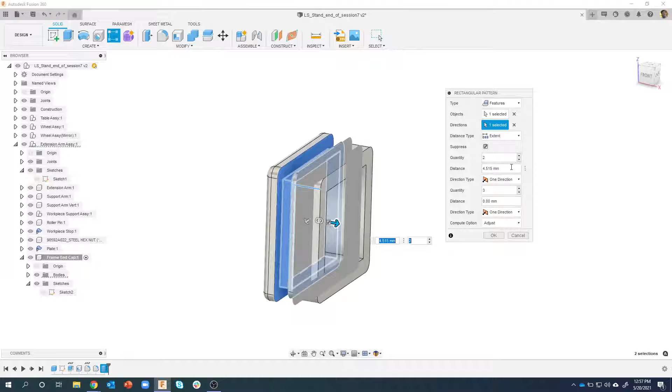And I'm going to say extent, and the distance I want is to be 5. So you can almost think of it as just a single pattern. I'm going to go ahead and say OK. And it took that one and created a pattern of it. So I could have copied and pasted, I could have re-extruded with an offset, or I just used a pattern in this case.

Okay, then one more thing here. I'm going to go back and edit the original sketch. Draw a rectangle, and I want to do a centered rectangle. And I'm going to click on this edge right here, and you'll notice it kind of finds the center for me automatically. And I'm going to start to move. Now the height is really important, so I'm going to type in 8, and then hit Tab.

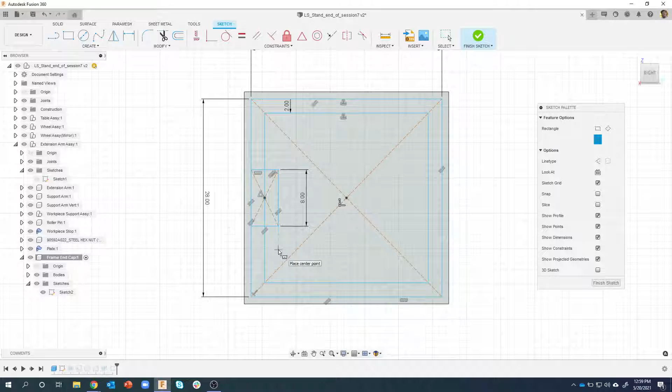Now watch what happens when I come over and try and click on this edge. You'll notice that it doesn't snap to it. But if I move up here where that little plus symbol is, you'll see that it does snap to it. So if you're trying to move and it doesn't snap, try going to the other opposite corner, and you'll see that sure enough, it's going to do a coincident constraint for me right there.

I'll do the same thing here. Height needs to be 8. I'll tab over. If I get near this edge, I don't get anything, but if I come up there, it snaps. I'll say OK.

Now, here's the thing. Watch what happens if I grab this point. My whole sketch moves. Now, why is that? Well, it was because I did those snap guides. Remember those blue dashed lines? It's just a guide, nothing like a constraint or anything like that. So how would I fix this?

Well, some of you might be able to draw a line from corner to corner and then make that point the midpoint of that line. That would absolutely work. But this is the tip I think Blaze showed me, hopefully that's correct, to hold down that shift key when you're doing a horizontal vertical.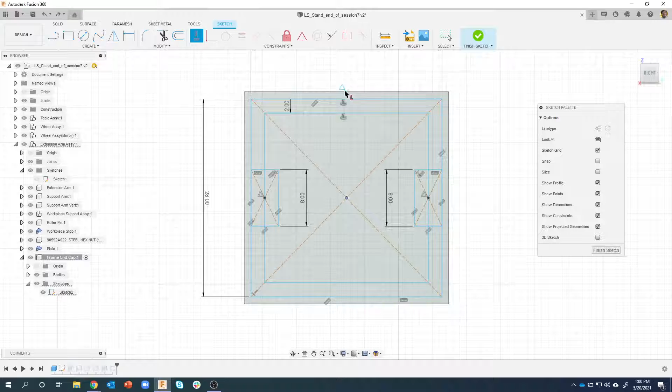And this is kind of cool to watch. So I'm going to say horizontal vertical, and I want this point to be vertical with the center of this edge right here, but you'll notice nothing's really showing up. But if I hold down my shift key, you'll see it's going to find the center or the midpoint of this line. So watch what happens when I click there. You'll see some of my lines turn black, the ones that can't move horizontal anymore.

Okay, so now let me do the same thing again. I'm still in my horizontal vertical. I'm going to click that point there. I'm going to come over here, hold down my shift key, and you can see that icon appear. I'll click there, and notice my sketch is now fully constrained.

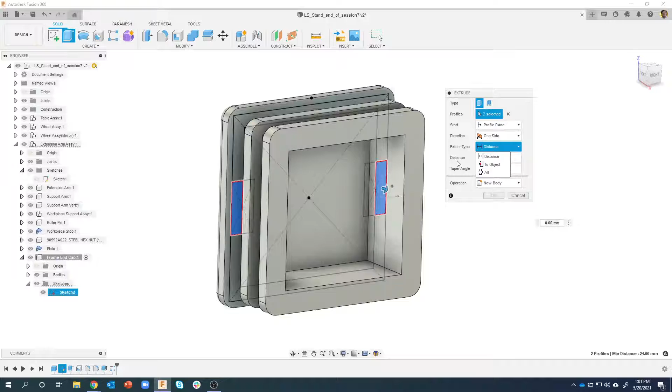I'll finish my sketch. We'll turn this guy back on, and then I can use these outside profiles. Let me grab that guy there. Say extrude to object. I mean, I could say all, but I don't want it to go backwards, so I'm going to say to object. I'm going to grab this front face, and we can see that it's going to extrude that front face like so.

And we now have this piece of plastic that can kind of snap into the end much easier. In fact, I'm going to hit A for appearance, and grab our existing black plastic texture that we've been using.

Okay, and then I want to position where it needs to go. We're going to go a few minutes over. I have a customer call at the top of the hour, so hopefully he won't mind being a few minutes late because I want to finish this up.

I'm going to say let's create a joint, a rigid joint, and check this out. I'm going to hover over this face right here because this is what's going to touch the metal part. If I rotate a little bit, you'll notice there's a tick mark right at the center. So I'll click on that, and it's on the plane of this face. I'll zoom out a little bit.

We'll zoom up on this guy, but you'll notice there's not something in the middle. If I zoom up just a little more and hover over this flat face here, I can click that point, and you see it perfectly snaps into place. We can see how that slides into place there. I'll say okay.

Okay, and then the last step basically is we want to copy this whole arm assembly and put it over here. So to do that, I'm going to activate my top level assembly.

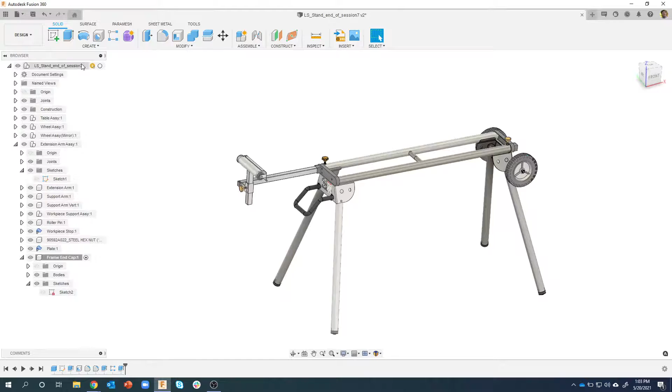Ethan said he's a huge fan of the horizontal vertical constraints. Yep, I totally agree, especially that shortcut. I always forget about it, but that shift snap to the center is a huge time saver instead of drawing a construction line and all that kind of stuff.

Okay, so we have this whole extension arm assembly. I'm going to right mouse click on it and say move copy. Now the first thing I want to do is make sure it's set to components, which it is. The first thing I want to do is say create copy before I do anything else.

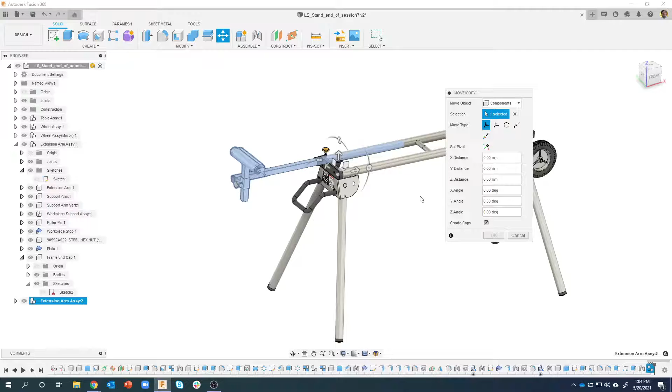Then I can start to rotate and watch what it does. It creates a copy of it. I'm going to rotate it 180 degrees, and maybe we just kind of move it to where it needs to be, just over here somewhere. I'll say okay, and we now have an extension arm assembly 2.

So there's the original, there's the new guy, and then all we have to do is create a joint. Let's do a slider joint because we want it to slide. And I want the center of this to slide through the center of that opening there.

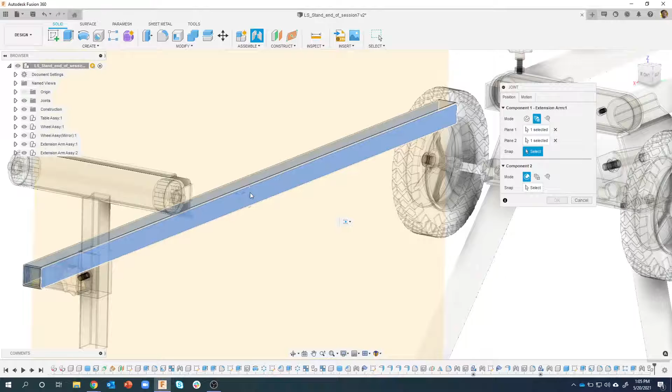So I'm going to again use between two faces. I want to find the center between that face and this face. Now watch the snap. This is kind of hard to see, but it basically created a plane that slices through the middle of it. Then as I hover over this face, you can see a face has a start, a middle, and an end, and we can see this middle point right here. When I click on that, it actually grabbed the middle of that pipe.

And then the same thing over here. I'm going to say between two faces, between that face there and that face there. Now you'll notice when I hover over this face, it has that plane kind of in the middle, and that middle point is right there. So I'm going to go ahead and click.

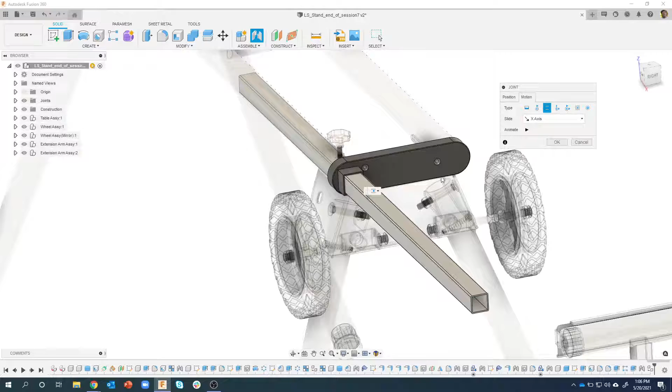Now my slider is going in the wrong direction, but that is an easy fix. Let's go x-axis. Zoom out a little bit. We can see that that works.

And you're all going, well, how come it didn't move all that? Well, as soon as I say okay, it knows that those all have to stay together. In fact, if I were to drag that arm, we can see that all of those move together. There's the sheet metal parts we've created, all that kind of stuff. And these are individual. I can change the lengths of either of those or the positions of either of those.

Okay, I know that was a lot. We went just a few minutes over, but this is kind of the end of the series here. I'm probably going to do one more on doing like an exploded view with a parts list and all that kind of stuff. So keep an eye out for that.